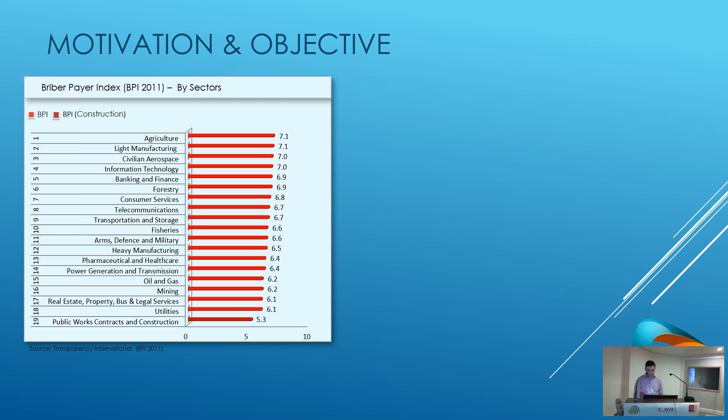Why should we actually study corruption? You see here that our construction industry is the most corrupt sector among all economic sectors. We are engineers, we like numbers. If we look at the cost of corruption, it is an average of 10% of the global construction market.

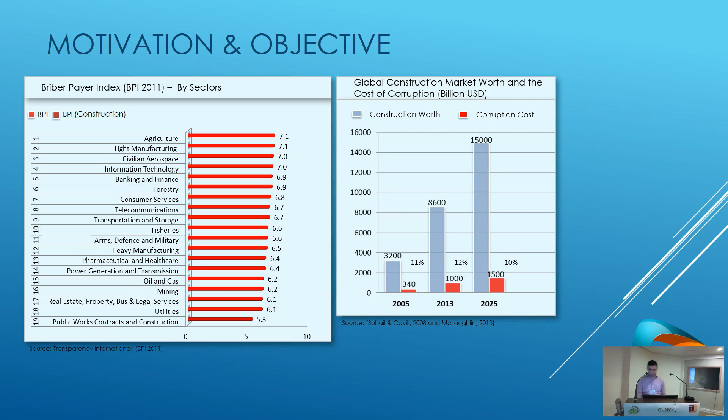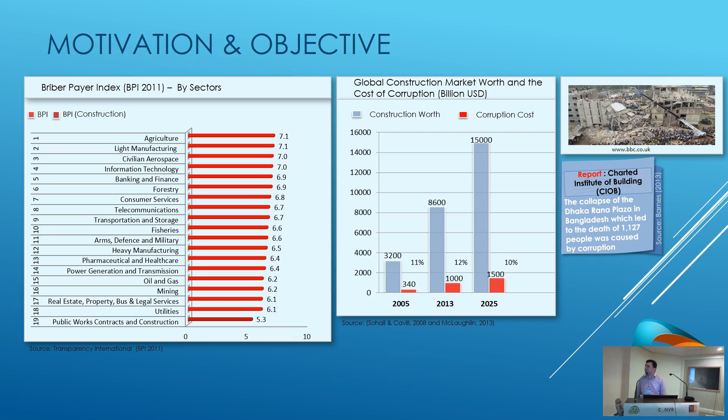A deeper and more important point is the life of people. For example, in the collapse of a factory in Bangladesh, more than 1,000 people died due to corruption. That way, our aim is to study corruption in construction and try to reduce it with a Lean approach.

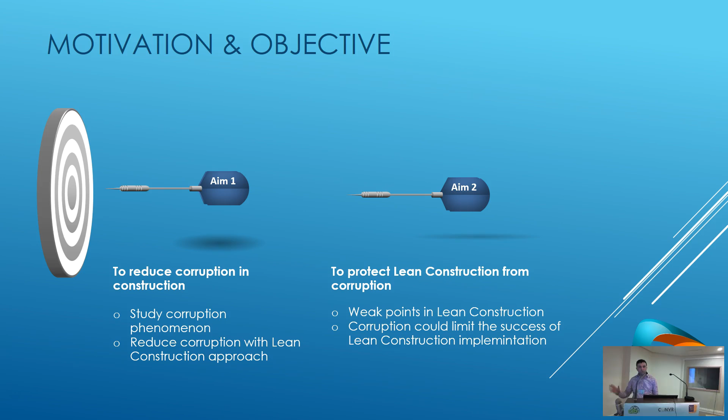But when we did that, we found weak points, that corruption can actually be a barrier to the good implementation of Lean. That way we say, okay, we have first to protect Lean construction from corruption, then use Lean to reduce corruption.

As method, we use interview, observation, and benchmarking as the way to develop our anti-corruption toolkit.

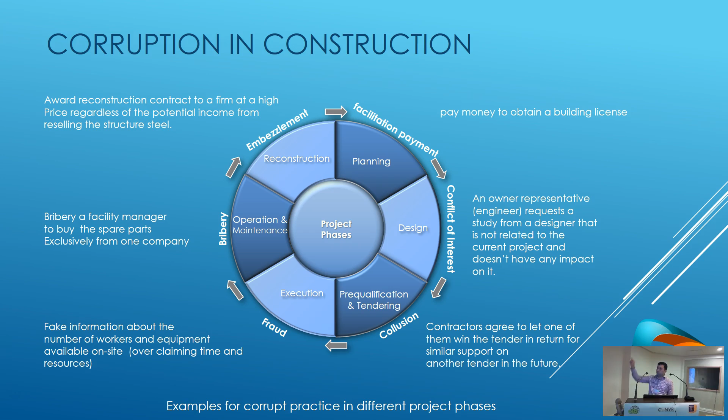If we speak about the form of corruption and the project phases, here is one example. You see that in the planning phase, for example, there is a facilitation payment to get a building license. This facilitation payment you can see as well in the execution phases.

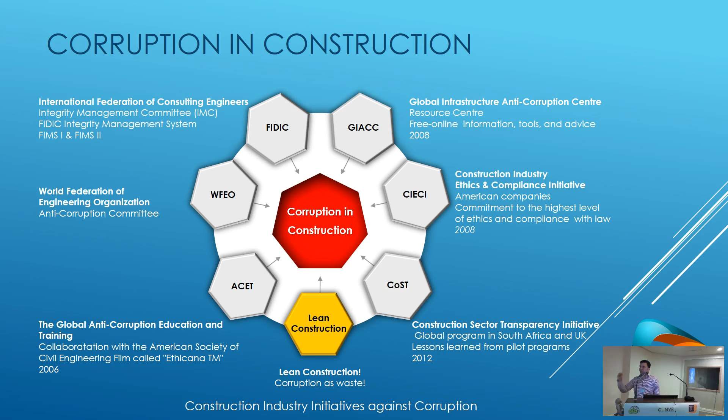Moreover, we studied intensively the efforts against corruption in the construction industry, which is our main tool to benchmark the best practices of organizations or activities like the International Federation of Consulting Engineers or the Global Infrastructure Anti-Corruption Center. Our aim is to bring Lean construction on board, and the key for that, we believe, is to consider corruption as waste in Lean.

If we come to Lean construction, you know this, every one of you. If you look here: people, culture, value management, cost management - all of these issues are actually related to corruption, or corruption is related to these issues.

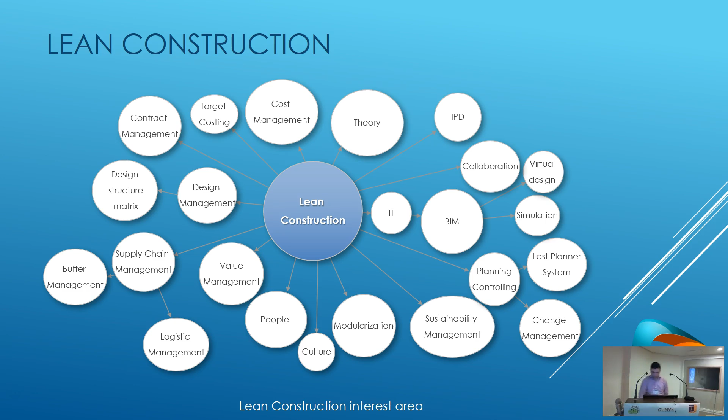We just focus at this stage on the theory and the practice of Lean construction, meaning the theory of Professor Koskela and the Last Planner System of Professor Ballard. And we understand Lean.

So what we do is study the relation, or the impact, of corruption on both of these parts: theory and practice.

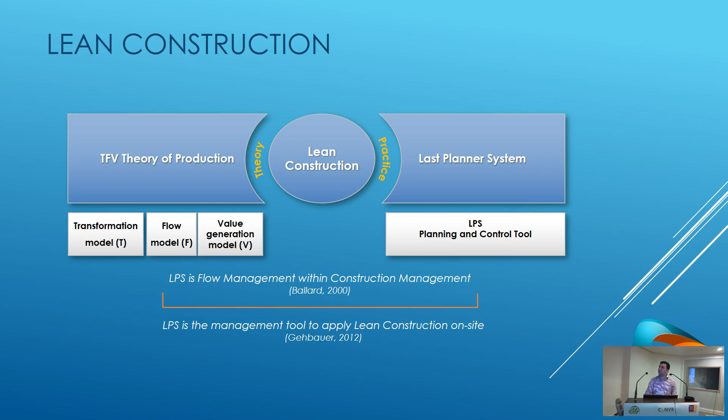If we come to the transformation concept or model in the theory of Professor Koskela, we will see the impact of corruption on the material. We will see that material is an essential gateway for corruption, and there are many reports about that.

You see here also that labor corruption decreases productivity. From the case study, there were many laborers employed not for their experience but for their relationship with the senior staff. For machines it is the same case.

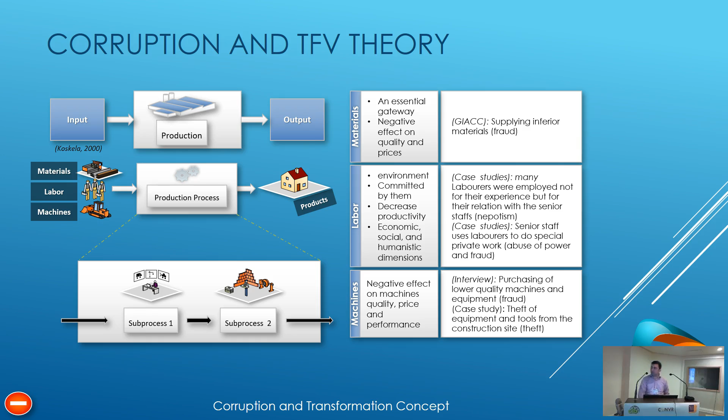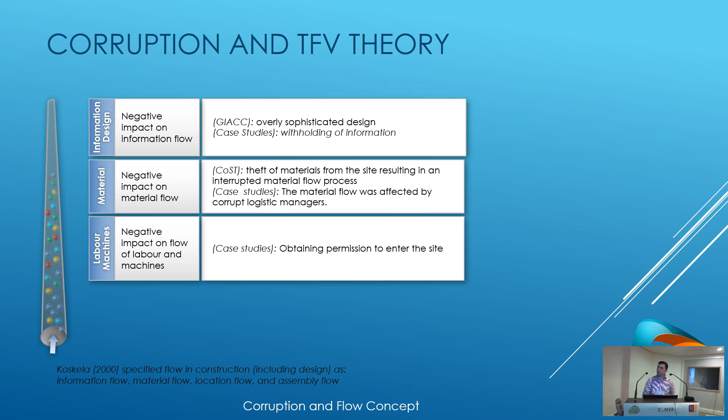If we go and look at corruption with the flow model: without corruption, the flow should be like this. With corruption, you see the corruption negatively impacts the information flow as well as the material flow, labor, and assembly. In such a case, with corruption, the flow will look like this, also showing a negative impact in the flow concept.

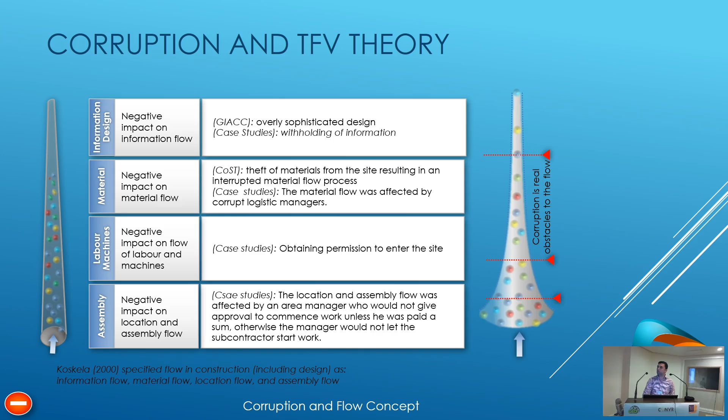We come to the value concept, or value generation. The value for us in Lean is the heart of Lean. And Lean, okay.

Whatever you define value as—quality, cost, money, or even the value of people's lives—corruption has a negative impact on that value.

We come now to the Last Planner System. Before that, we see that it's a system which should be green or amber for everything, but corruption can actually be a reason for constraints or negatively impact the constraints analysis process.

In one of the case studies, there is a subcontractor who will commit to do the work, but he sells the contract to another subcontractor, so the chain becomes longer. This means he commits that he can do the work, but in reality he will not be able to do that.

Here we see that there is a conflict of interest. For example, when one subcontractor commits to do the work and says he will do it, but he doesn't do it quickly—the reason is he waits to open a new area.

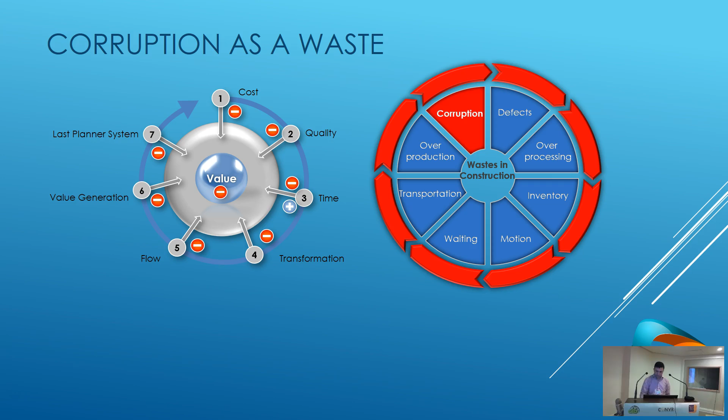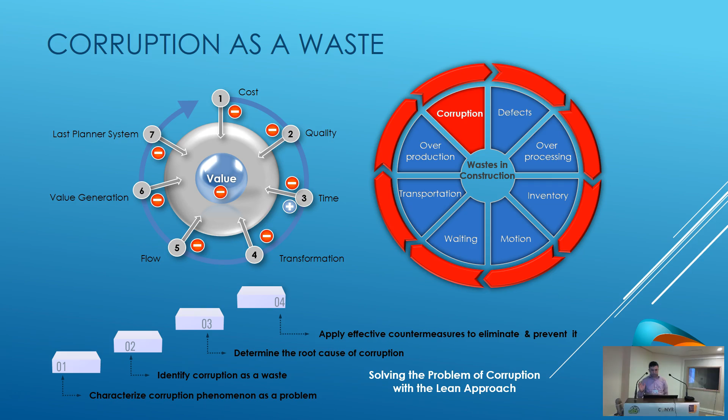Up to this stage, we can determine that when we consider corruption as a waste in lean, we can apply the problem-solving methods of lean construction to corruption.

What we found is that the main reason for corruption is lack of accountability, integrity, and lack of transparency. The joint word here is 'lack of.' We take integrity, accountability, and transparency and develop a concept—what can we consider these three together?

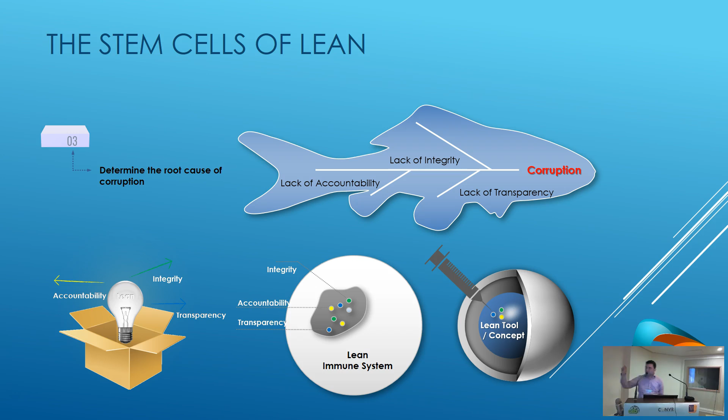We say, okay, it is like stem cells. This principle should be applied and existing in all lean concepts or lean tools. That means if we have a lean tool or lean concept and we don't have one of these principles, we try to implement it in these tools.

Transparency—I will not speak so long about it. Accountability is already available in lean. I will speak about integrity, where we look for a model that fits our lean core and lean concept.

We found that from around 2013, many scholars worked on integrity. We just take a simplification, and we take one model where integrity is defined as honoring one's word, because this model links integrity to productivity and performance.

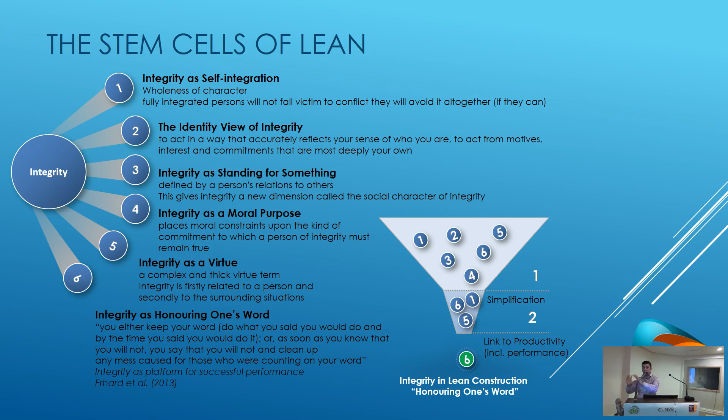That is one of the lean aims—to increase productivity and performance. Be careful, this 'honoring one's word' consists of six parts, one of them being moral and ethical. I cannot promise you I will give you money if you give me the project or award me the project—that is not what we mean here, because it doesn't fit moral, ethical, or legal standards.

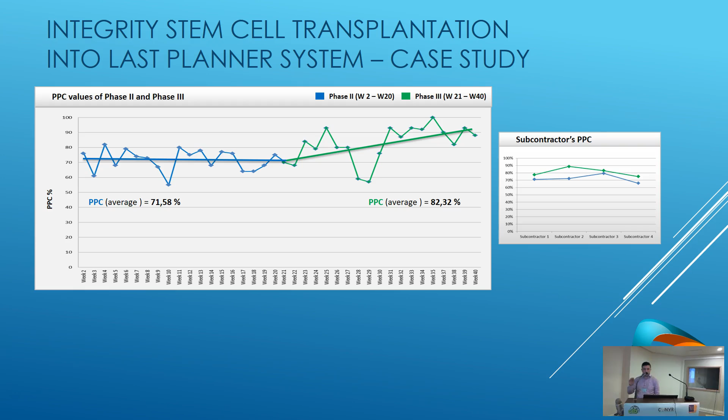Let me go to our case study, where we test this with the Last Planner System. We found that transplanting integrity into the Last Planner System actually increased the PPC, but it is actually not enough.

What we need is all of this set together—integrity, accountability, and transparency. We are not able to implement all of this toolkit at once.

We have an implementation strategy where we start at the project level and, in the long term, move to the organization level, and this toolkit will help in reducing corruption in our industry.

I'm finished—I'm coming here to fill the gap. From our research, we consider corruption as waste. Corruption is a barrier to implementation, and we can say that we should use the Last Planner System as a practical tool of lean to enhance integrity and fight corruption in our industry.